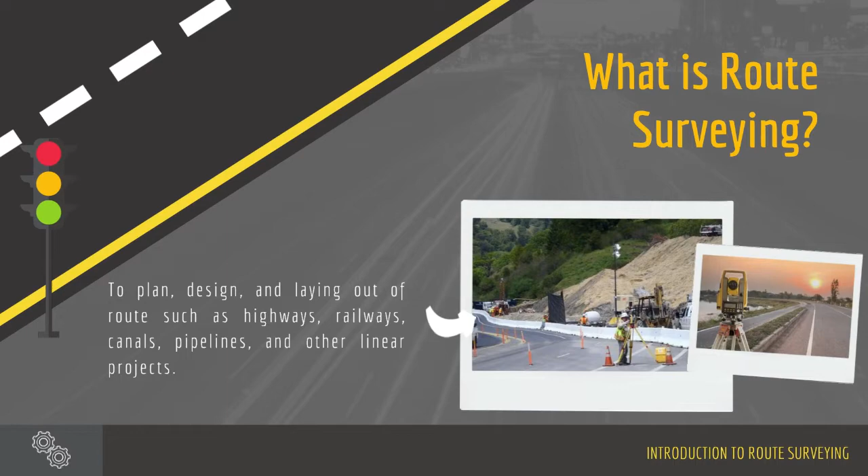The term route survey refers to surveys necessary for the location and construction of lines of transportation or communication that continue across the country for some distance, such as highways, railways, open conduit systems, pipelines, and power telecom lines. Generally, the preliminary survey for this work takes the form of a topographic survey.

What is the purpose of route survey? The purpose of route survey is to provide critical information regarding the existing roads and bridges condition, terrain, and other route constraints. A route survey is usually required for the planning of right-of-way, the acquisition of fee or easement of property, and for eventual construction layout work.

The location of the facilities within the right-of-way are often held in respect to the center line or a right-of-way line. A route survey is made on the ground to provide for the location of right-of-way lines, a center line, or reference lines in relation to property lines and terrain features.

Route surveys shall include but are not limited to the proper location, monumentation, description, or platting of the following routes. Examples are roadways or highways and railroads, transmission lines for communication, fuel, chemical, water, and electrical needs, canals, waterways, drainage ditches, and sewers, and view easements, airspace easements, ingress and egress easements such as approach routes.

But there are two route survey main aims: determining the best route between two terminal points, and fixing the alignment and grades of the selected route.

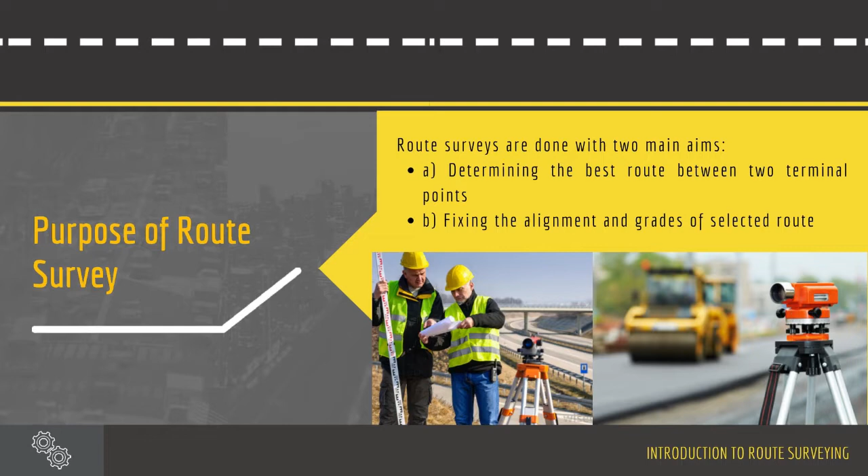At B, road alignment is the positioning of the center line of the highway or road. It is also called highway alignment. Simply, it is the direction through which the road will pass.

Moving on to the important structures of route survey. Route surveys include locating proposed new transportation systems or surveying existing routes for modifications or improvement. Route surveys shall include but are not limited to the proper location, monumentation, description, or platting of the following routes.

First, we have roadways, highways, rapid transit, and railroads. A frequent task of surveyors is to stake out the position of a transportation route, usually for the construction of a new railway line and highways between two places, wherein proper surveying is required. The goal of surveyors is to locate the most direct and efficient route possible. Members of the route survey team can give route and grading recommendations to assist engineers in preparing plans.

Next, we have transmission lines for communication, fuel, chemical, water, and electrical needs. We also have canals, waterways, pipelines, drainage ditches, and sewers. A route survey is a data collection operation to gather information not only for the proposed route of a roadway or railway, but also for power transmission lines, pipelines, canals, sewers, etc.

Most of the basic surveying concepts and methods described in the previous chapters apply to route surveying. Horizontal distances, elevations, and angles must be measured, maps must be drawn, and profile and section views of the route must be prepared.

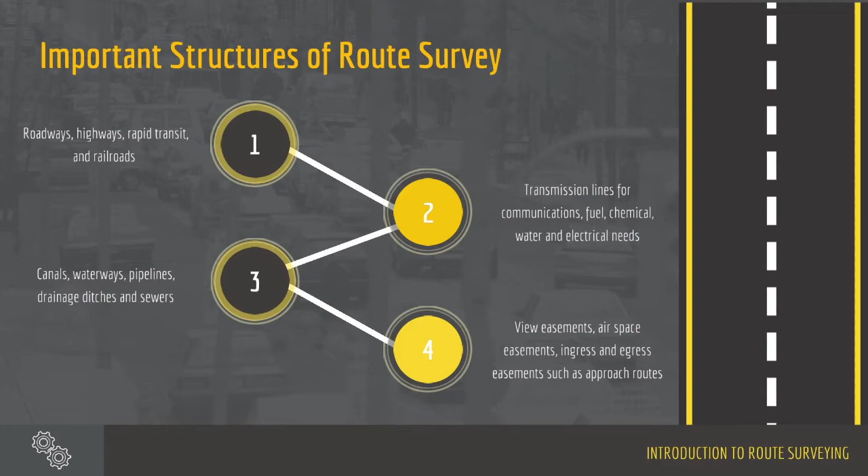So here are some of the structures and routes that are being staked out during route surveying: airspace easements, canals, transmission lines, railways, highways, and pipelines. Now let's discuss the features of route survey and design.

Surveys are required for all types of route alignment, planning, design, and construction work. Route surveys range in complexity depending on the size and scope of the project.

For complicated projects such as building a new highway or public road, they definitely require a lot of tasks and undergo different processes. The surveyors must also work extensively with the contractors, governments, and landowners involved to prepare documentation outlining all of the steps necessary to safely construct a new roadway on a given piece of land.

Small jobs involving simple road widening or minor improvements may be relatively simple and require a minimum amount of information necessary to prepare plans and specifications. The usual contracting requirement is that the job must be done in the shortest possible time at the least possible cost, hence they don't usually use a lot of surveying instruments. Also, if conducted properly by an astute and experienced surveyor, they can definitely save a lot of time and expenses.

Lastly, large complex projects such as a brand new multi-lane highway will involve extensive data collection to determine the best location, to prepare plans, specifications, and estimates for construction, and to prepare the legal documents and maps required. Complex projects depend on so many variables, hence they require extensive data, sufficient funds, and enough time.

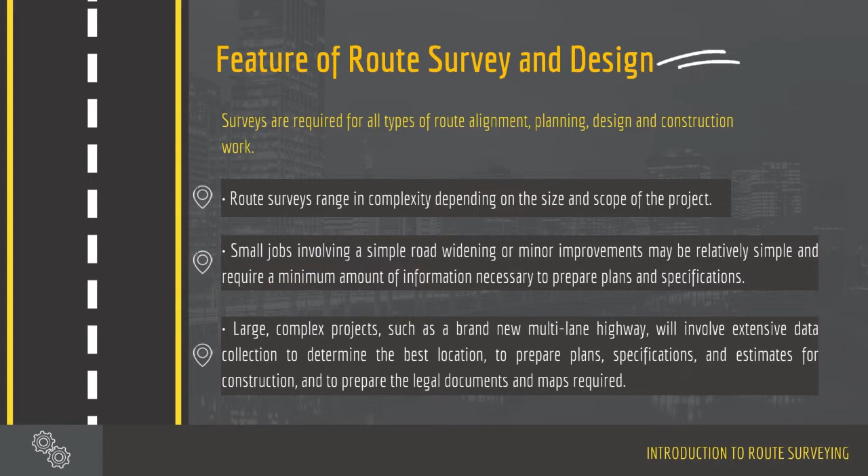The size of the property being surveyed is another contributing factor in the complexity of surveying projects, since the larger the property, the more time it will take to finish and the more information you need to acquire. It is the function of the project surveyor to plan the surveys and collect the survey data needed to plan and lay out the final design.

This will include, first, planning and establishing horizontal and vertical control. Horizontal and vertical control are established to provide a foundation or framework on which other surveys can be adjusted. These control surveys are utilized for precise mapping in the construction of underground utility systems, highways, power lines, tunnels, and a variety of other high-precision projects.

The district survey party chief decides if this control becomes the preliminary line. If done correctly, this layout method facilitates efficient use of the survey information by all project staff. Any adjustments to the location of the proposed improvement can be made without waste of survey work.

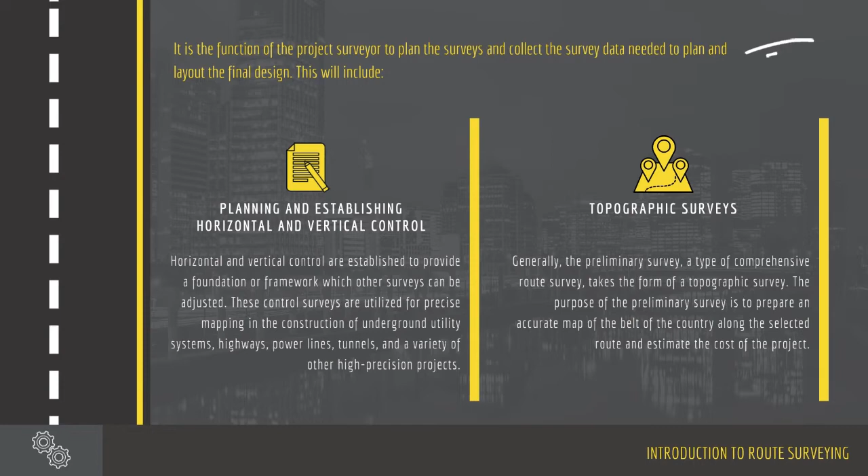Next, topographic surveys. Generally, the preliminary survey, a type of comprehensive survey, takes the form of a topographic survey. The purpose of the preliminary survey is to prepare an accurate map of the belt of the country along the selected route and estimate the cost of the project.

Lastly, construction surveys for design location. Before construction surveys are done, a route survey is made to physically establish a location in the field. It includes the location of all man-made features in relation to the established roadway center line in such a manner that these features can be accurately indicated on the plans.

Route surveys include both horizontal and/or vertical plane surveys. Horizontal and vertical plane surveys are developed to create a framework. These surveys are used for accurate mapping projects in the construction of various high-precision projects.

Alignment is the shape or geometry of any transportation route. It is the position or the layout of the center line of the highway on the ground. Alignment surveys are widely provided for safety and protection purposes of different routes and highways.

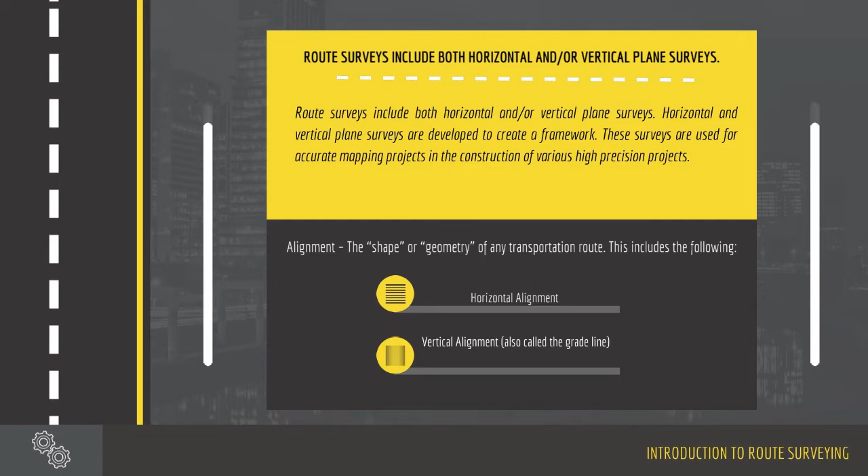Highway alignment includes horizontal alignment and vertical alignment. The projection of highway alignment in the horizontal plane is termed horizontal alignment, and the projection of highway alignment in the vertical plane is called vertical alignment. Alignment must be selected in such a way that the overall cost during construction, operation, and maintenance is minimal.

Next, route surveying operations. A comprehensive route survey consists of the following tasks in order. First, reconnaissance of terrain between terminals. The reconnaissance survey involves an examination of a wide area from one end of the proposed route to the other. It is the first step in selecting alternative routes.

A reconnaissance survey is a rapid but thorough examination of an area, which is a strip of territory between the terminals of the project. It is carried out to determine the several possible routes which are worthy of detailed survey. For most projects, this would be done using existing small-scale maps and aerial photographs, although ground reconnaissance surveys may be used for the relocation of short sections of existing routes. In some cases, a complete topographic survey may be conducted so that an appropriate map can be prepared.

Next, preliminary surveys over one or more locations along the general route. The preliminary survey may be conducted on the ground with surveying instruments or in the office using aerial photogrammetry. It is made of the best of several lines investigated during reconnaissance survey. The purpose is to prepare an accurate map of the belt of country along the selected route and estimate the project cost. When there are two or more routes under consideration, preliminary survey is conducted along all of them, and based on the data accumulated, final selection of the route is undertaken.

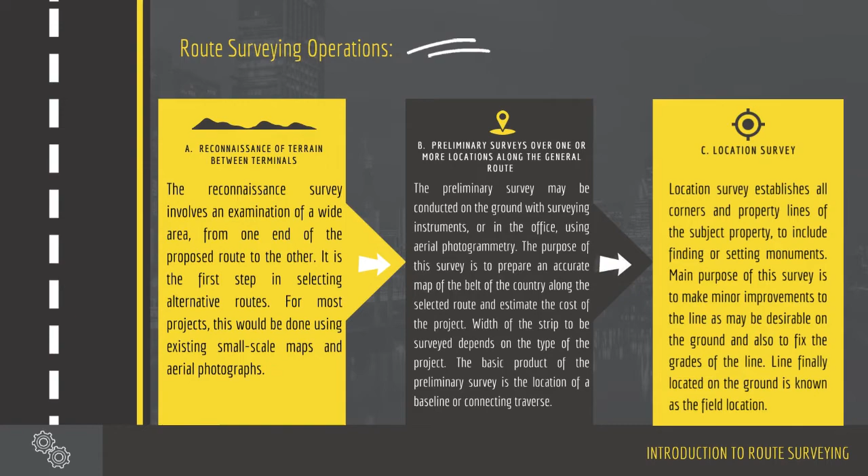Lastly, the location survey. This is the ground location of the proposed line marked on the map. Its main purpose is to make minor improvements to the line as may be desirable on the ground, and also to fix the grades of the line. The line finally located on the ground is known as the field location.

Moving on to the general classification of terrain. The topography of the land traversed has an influence on the alignment of roads and streets. Topography does affect horizontal alignment, but it's more evident in its effect on vertical alignment. To characterize these variations, engineers generally separate topography into three classifications. First is level terrain, the condition where highway sight distances, as governed by both horizontal and vertical restrictions, are referred to as level terrain. These are generally long or could be made so without construction difficulty or major expense.

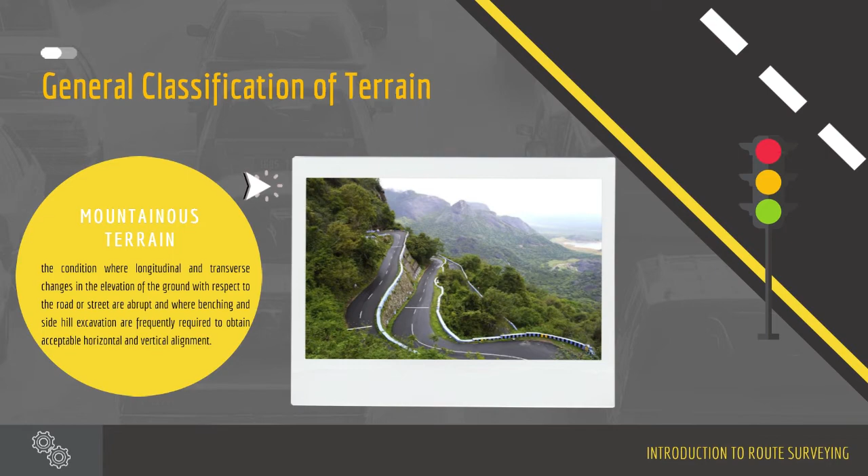Lastly, we have mountainous terrain. This is the condition where longitudinal and transverse changes in the elevation of the ground with respect to the road or street are abrupt, and where benching and side hill excavation are frequently required to obtain acceptable horizontal and vertical alignment. So the topography of the land traversed influences the horizontal and vertical alignment of a highway. Terrain classifications pertain to the general character of a specific route corridor, and for design purposes, variations in topography are categorized by terrain.

Next is the location survey. A location survey establishes all corners and property lines of the subject property, including finding or setting monuments.

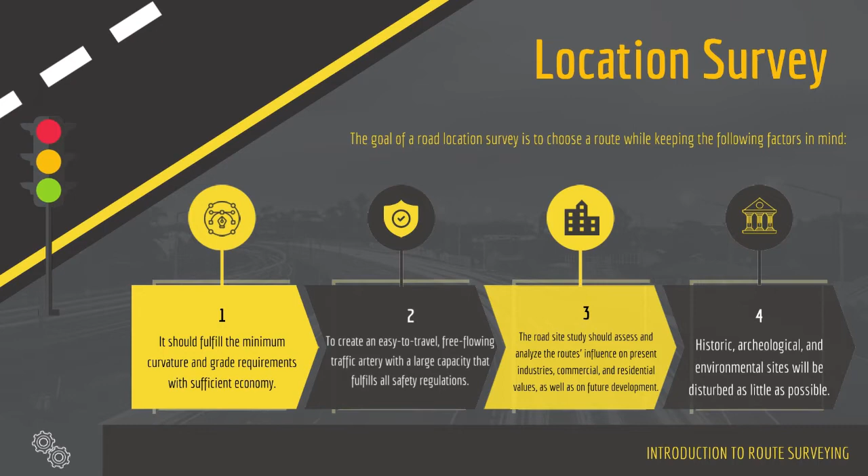So the goal of a road location survey is to choose a route while keeping the following factors in mind. First, with reasonable economy, it should fulfill the minimum curvature and grade requirements. Next, to create an easy-to-travel, free-flowing traffic artery with large capacity that fulfills all safety regulations. Next, the roadside study should assess the route's influence on present industrial, commercial, and residential values, as well as on future development. And lastly, historic, archaeological, and environmental sites should be disturbed as little as possible.

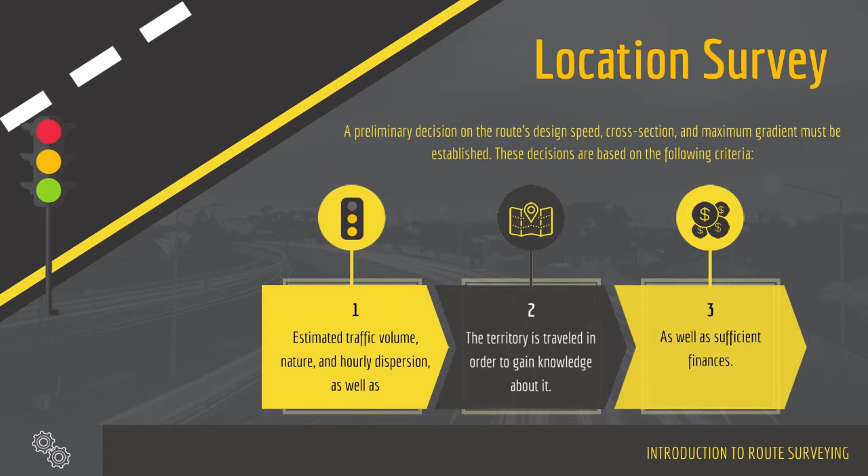Also, before beginning a field study for any highway location, a preliminary decision on the route's design speed, cross-section, and maximum gradient must be established. These decisions are based on the following criteria: first, consider the estimated traffic volume, nature, and hourly dispersion, as well as the territory traveled, in order to gain knowledge about it. And lastly, provide sufficient finances. So after comparing the different alternative designs, the route is selected which has the cheapest overall cost, considering capital investment, maintenance expense, and savings to the road user.

Next, we have the reconnaissance survey for highway location in rural areas. The objective is to identify several feasible routes, and the following methods can be employed: the conventional ground method and aerial photography. Either or both of these methods are undertaken to identify factors such as terrain and soil conditions, serviceability, crossing of other transportation facilities, directness of route, and environmentally sensitive areas.

Third, we have the preliminary location survey. After the preferred location has been established, this survey serves as the basis for fixing the actual highway location. The economic evaluation of each possible route is considered along with environmental evaluation, as highway construction has a significant impact on its surroundings.

After the preliminary location survey, there's also a need to conduct a final location survey. This is responsible for fixing the details of the projected highway. In this phase, the detailed layout of the selected route is finalized, which includes horizontal and vertical alignments, positions of structures and drainage channels, through a trial and error process by the designer for engineering and aesthetic factors. The final location survey for roads is complete when all necessary information is available and ready for designers to use, ensuring all information required for preparation of complete construction is in place.

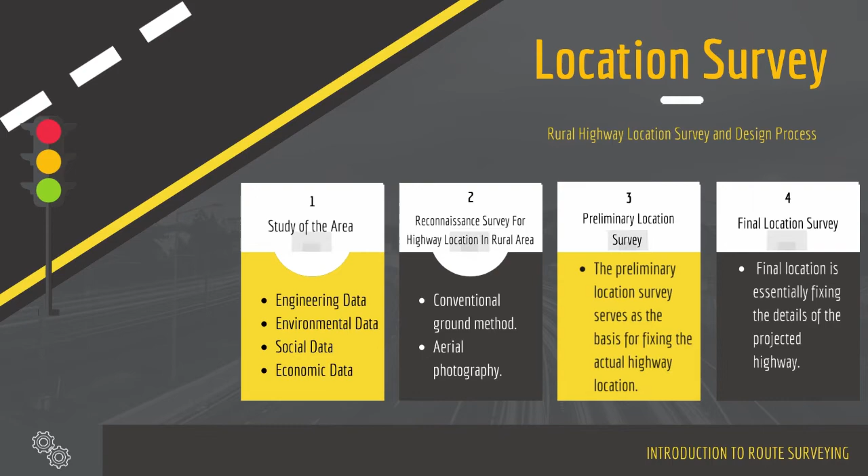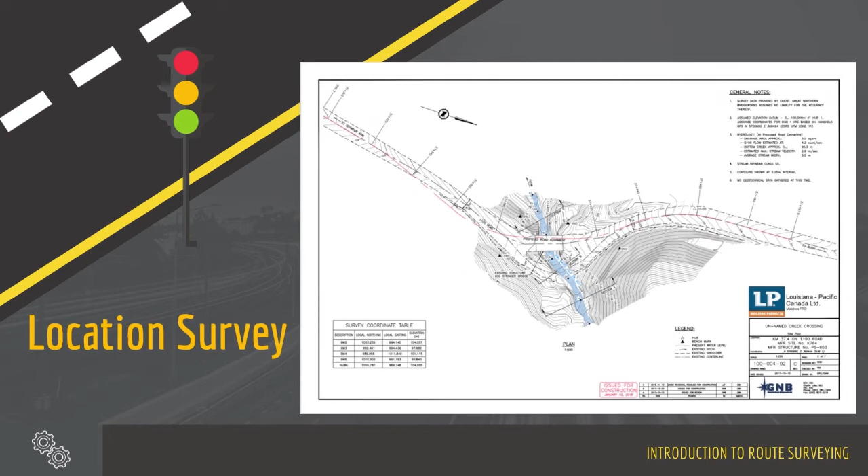The following characteristics should be learned in the desk study of the area for location survey for roads. Here is an example of location survey for roads. The factors mentioned before and the criteria were strictly followed in order to come up with this location survey for a specific road.

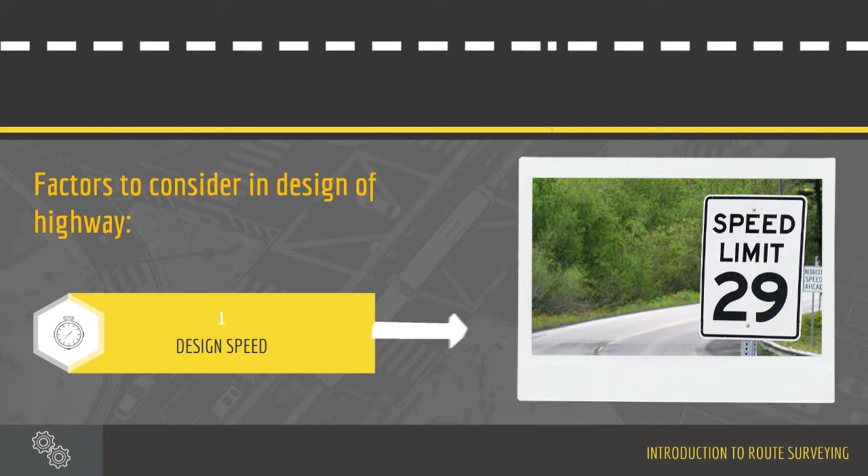Next are the factors to consider in the design of highways. First is design speed. This refers to the highest speed at which vehicles can travel on the road safely when the weather is favorable and the density of traffic is low, while also ensuring that the safe speed is only determined by the road's geometric features.

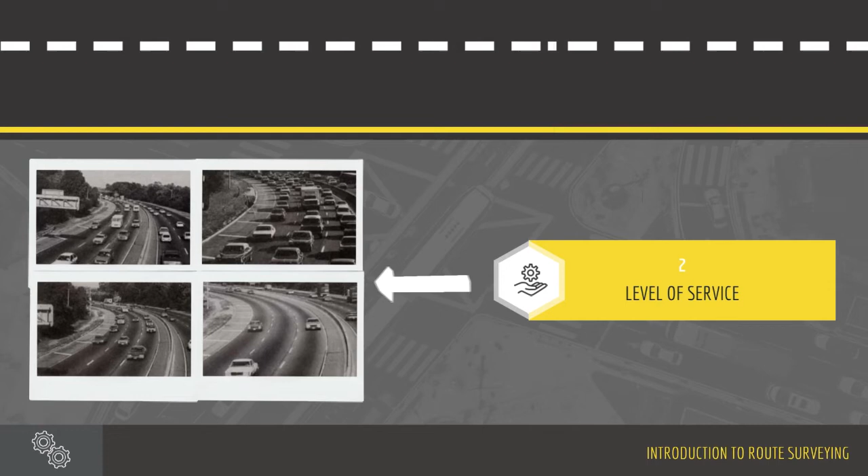Next is level of service, which refers to the qualitative measure of functional conditions within traffic stream. This is commonly described as freedom to maneuver, travel time, speed, comfort, safety, convenience, and interruptions. This criterion differs for multi-lane highways and is defined in density.

Next is traffic volume. Traffic volume is the average density of traffic that will run on a road in an hour of every day. With the help of these volumes, service flow rate and other calculations will help to determine how the road should be constructed.

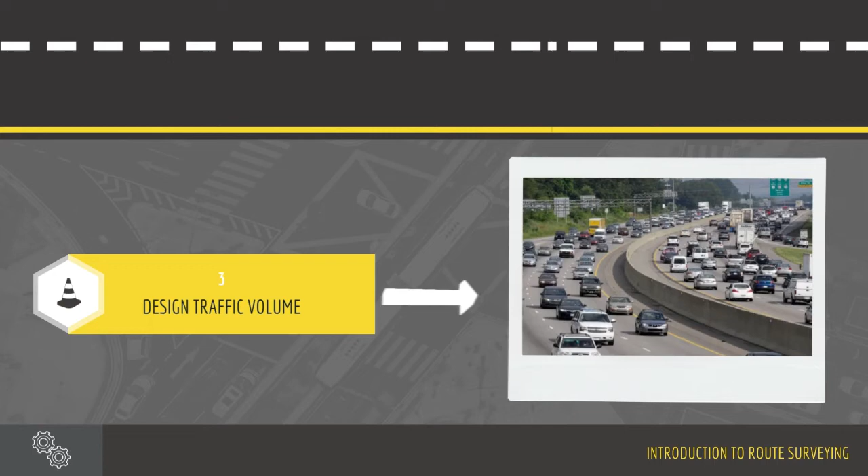Roadway context. The context of the road or highway is critical when developing a road construction project. This factor will determine fundamental design decisions like the cross-section, termination, detailed design elements, and street fixtures, to name a few.

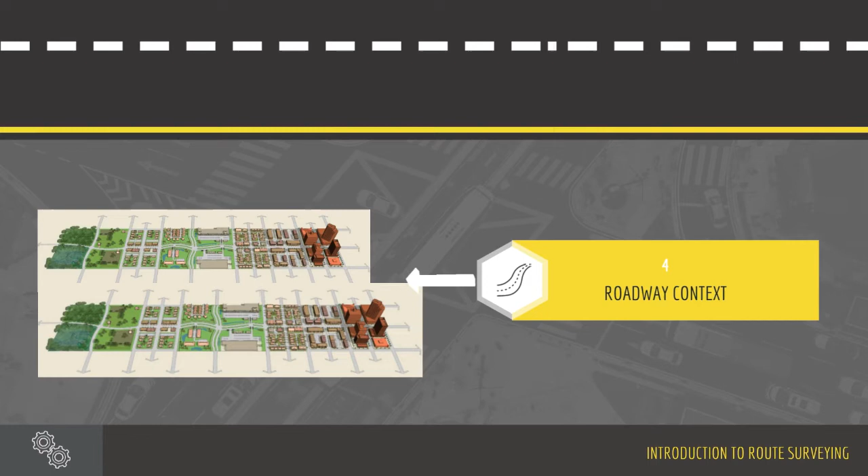In order for a project to be successful, it is important for the highway design to consider its surroundings and perspective. A design that is context-sensitive will start with analyzing the contextual elements like the community and environment that surrounds the area. Once the designer clearly understands the surroundings of a potential highway and its users, the rest is much easier to design and plan.

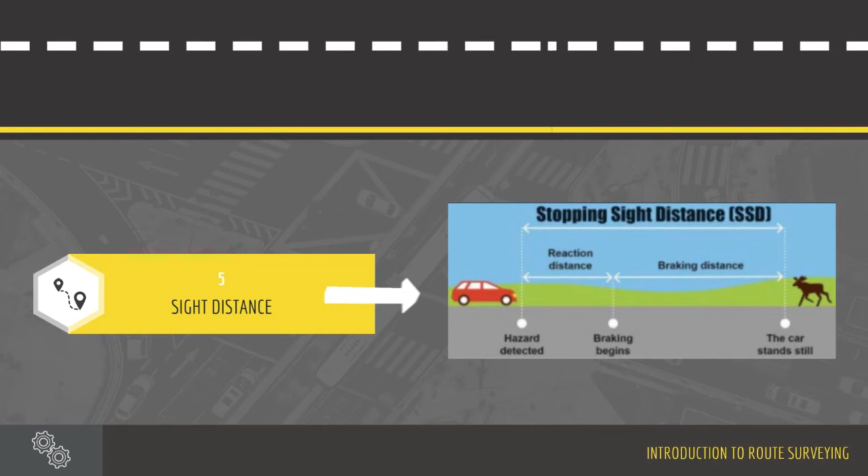Sight distance refers to the length of the road ahead that can be seen by the user of the roadway. Most times, specific distances apply to cyclists and motor vehicles. Stopping sight distance, decision sight distance, and passing sight distance are usually taken into consideration.

Lastly is safety. The safety that all transportation facilities provide is the primary consideration when it comes to geometric road design. While constructing roads, certain projects are specifically made to tackle existing safety hazards. It is important that all projects do eventually result in facilities that are extremely safe for its users. Conducting corridor safety audits and crash record analysis are a great way to discover any hidden safety hazards.

It is important for designers to pick project design elements according to their expected characteristics while operating, and according to historic performance when it comes to safety. All highways are tested before they become functional.

Moving on to the objectives of a preliminary survey. Its objectives are: number one, to survey the various alternative alignments proposed after the reconnaissance and to collect all the necessary physical information and details of topography, drainage, and soil.

Number two, to compare the different proposals in view of the requirements of good alignment. Number three, to estimate quantity of earthwork materials and other construction aspects and to work out the cost of the alternate proposals.

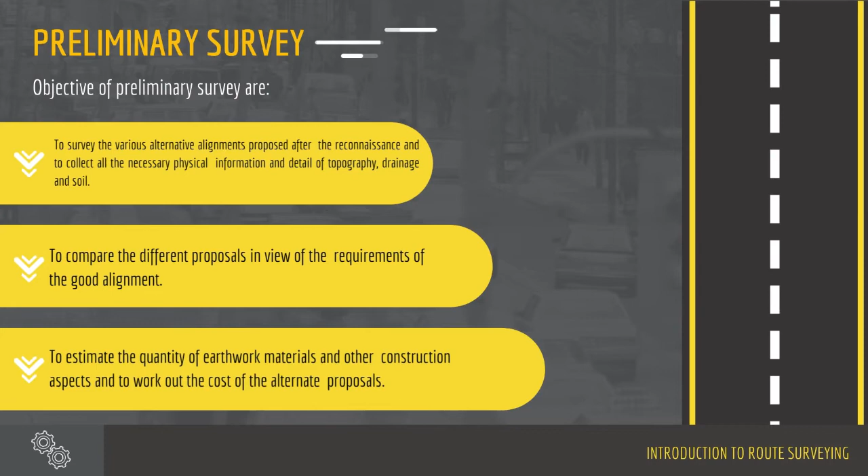There are two ways of conducting a preliminary survey. First is the conventional method. The survey party carries out surveys using the required field equipment, taking measurements, collecting topographical and other data, and carrying out soil surveys, which includes longitudinal and cross-sectional profiles of level terrain, rolling terrain, and mountainous terrain, and also includes other studies such as drainage, hydrological survey, soil survey, traffic, and material survey.

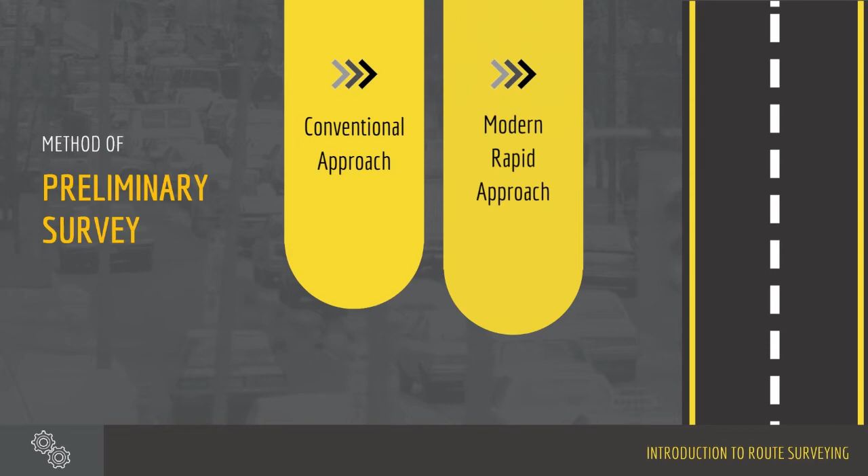The other approach is the modern rapid approach, by aerial survey, taking the required aerial photographs for obtaining the necessary topographic and other maps, including details of soil and geology. Preliminary surveys finalize the best alignment for all considerations by comparative analysis of alternative routes.

Stopping sight distance is the distance traveled during two phases of stopping a vehicle: perception reaction time and the maneuver time. Perception reaction time is the time it takes for a road user to realize that a reaction is needed due to a road condition, decide what maneuver is appropriate, in this case stopping the vehicle, and start the maneuver.

Taking the foot off the accelerator and depressing the brake pedal, maneuver time is the time it takes to complete the maneuver, decelerating and coming to a stop. The distance driven during perception reaction time and maneuver time is the sight distance needed.

The design standards of the American Association of State Highway and Transportation Officials, or AASHTO, which is also used by DPWH, allows 1.5 seconds for perception time and 1 second for reaction time.

The values of stopping sight distance used in design represent a near worst case scenario. For design, a conservative distance is needed to allow a vehicle traveling at design speed to stop before reaching a stationary object in its path. A generous amount of time is given for the perception reaction process, and a fairly low rate of deceleration is used. The design sight distance allows a below average driver to stop in time to avoid a collision in most cases.

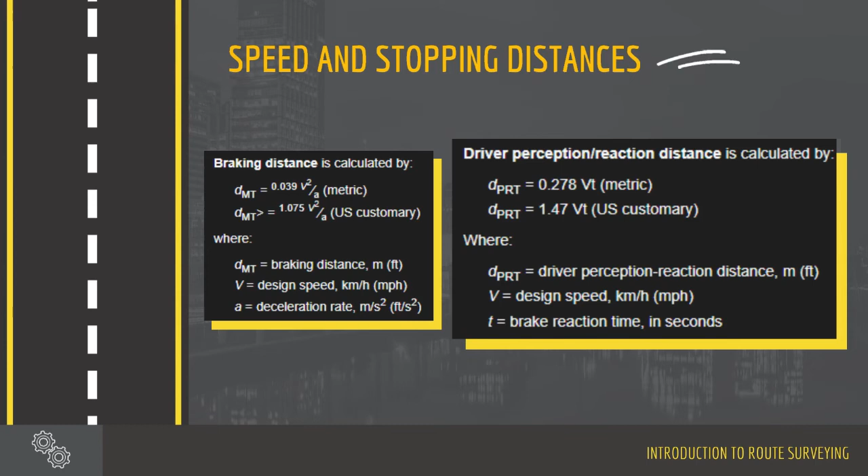Stopping sight distance is calculated by adding both reaction distance and braking distance. So we get the formula SSD = d_PRT + d_MT. For the metric scale, it is SSD = 0.278VT + 0.039V²/a. And for the imperial scale, it is SSD = 1.47VT + 1.075V²/a.

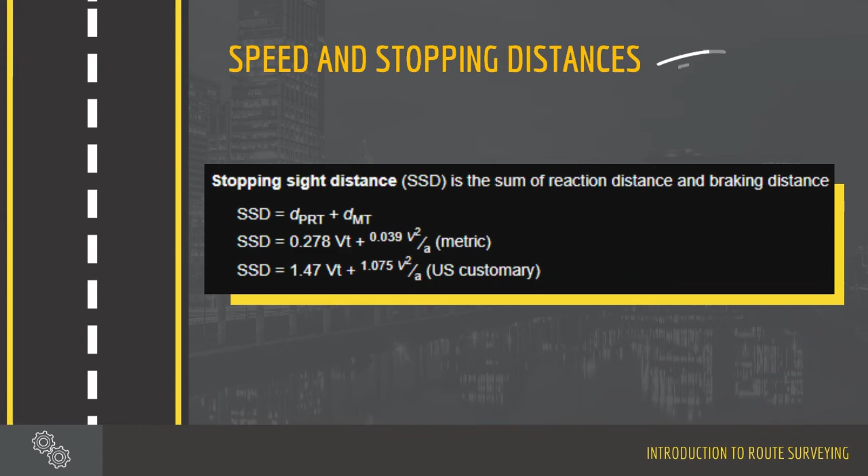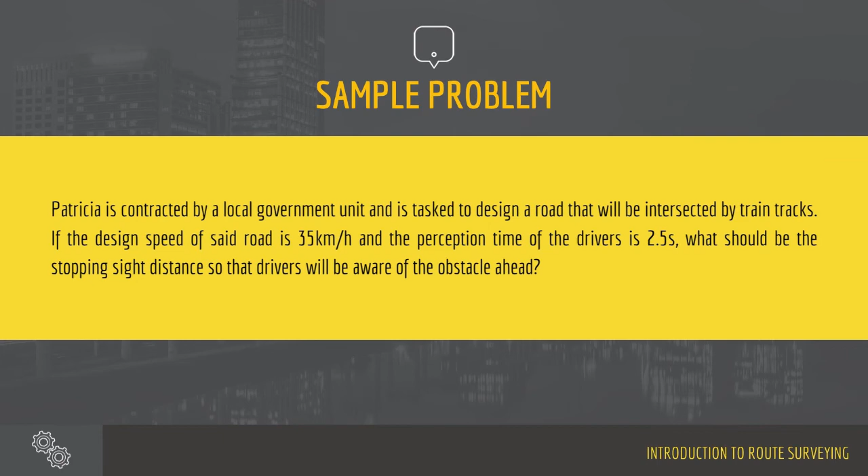Now to apply the formulas we just discussed with a sample problem. Patricia is contracted by a local government unit and is tasked to design a road that will be intersected by train tracks. If the design speed of said road is 35 km per hour and the perception time of the drivers is 2.5 seconds, what should be the stopping sight distance so that drivers will be aware of the obstacle ahead? First, we list down the given values in the sample problem.

So we have 35 km per hour for the design speed, 2.5 seconds for the perception reaction time, and the deceleration rate is always at a constant of 3.4 meters per second squared for the metric scale. Now to apply the formula. SSD = d_PRT + d_MT, which is translated to 0.278VT + 0.039V²/a. And now we substitute the variables with their values. We get 0.278 times 35 kilometers per hour times 2.5 seconds plus 0.039 times the square of 35 kilometers per hour, all over 3.4 meters per second squared.

Now before we input this in our calculator, we must first convert 35 kilometers per hour into meters per second so that it will be easier for us to cancel SI units. We convert 35 kilometers per hour to meters per second by multiplying it by 1000 meters over 1 kilometer times 1 hour over 60 minutes times 1 minute over 60 seconds, which gives us 9.72 meters per second. And we input that into our equation, so we get 0.278 times 9.72 meters per second times 2.5 seconds plus 0.039 times the square of 9.72 meters per second, all over 3.4 meters per second squared.